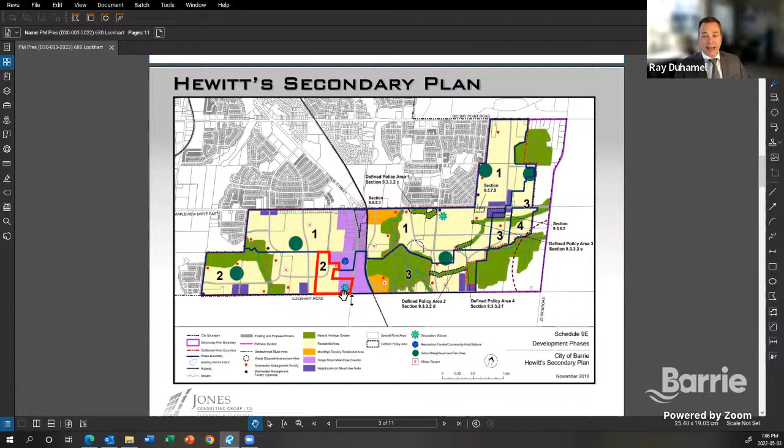This is the Hewitt secondary plan. As I noted, the lands are outlined in red, as you can see here, and they fall within a few land use designations. The first is the yellow area, known as neighborhood area, or residential area in the Hewitt secondary plan. Then this purple color represents the Yonge Street mixed use corridor. There's also this blue star shape, which represents a secondary school.

This is your new official plan, if you can see that okay. I know this is not yet in effect, but I thought I would share with committee and members of the public what the new official plan is sharing about these same lands. So the lands are outlined in red again.

They're adjacent to what is identified in the new OP as an intensification corridor. This stipple pattern throughout this area is known as the designated greenfield area. If you move to the right side of the screen, you can see the actual land use designations, now called neighborhood area rather than residential area, but effectively much the same thing.

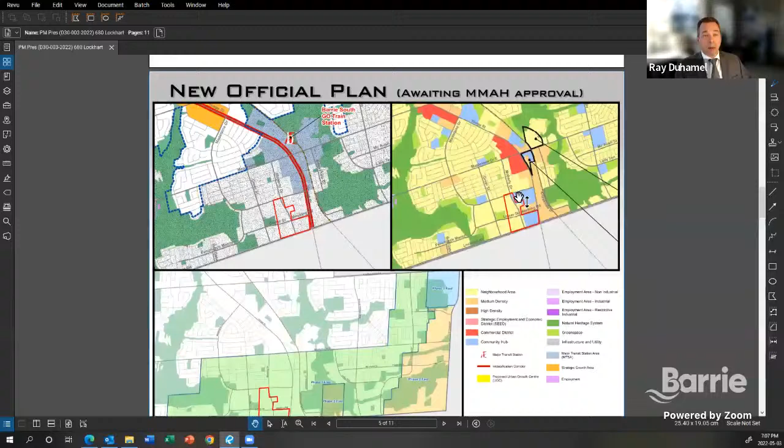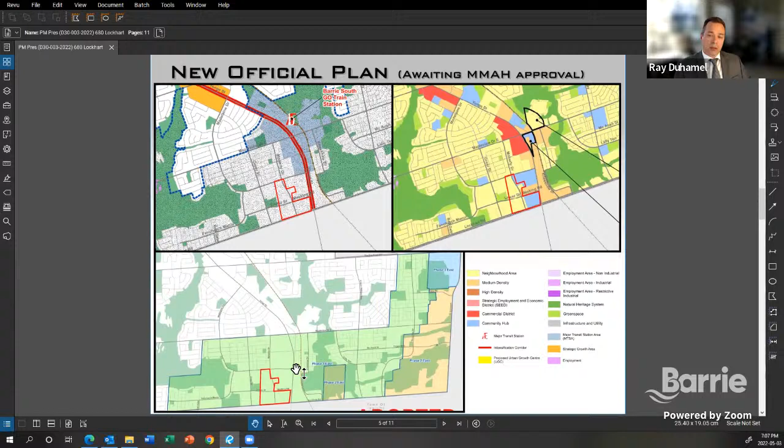Instead of mixed use in purple, like the Hewitt secondary plan, those are now shown as community hubs. Those lands will represent the Catholic high school, as well as a recreation center, library, and a public elementary school. In terms of phasing, you can see on this plan the lands fall within phase 2 of development, which is allowed to proceed immediately.

The process in proceeding with an application for a plan of subdivision and zoning bylaw amendment is to first submit a conformity plan to the City of Barrie so that technical staff can review the application to confirm whether or not the plan as proposed generally conforms to the Hewitt secondary plan.

In this case, at the bottom of the screen is Lockhart Road and to the right is Yonge Street. We provided for a mixture of housing types, including townhouses, detached, semi-detached, and some back-to-back townhouses proposed in this location, as well as the school block and a collector road northbound connecting Lockhart and Madelaine, and a collector road east-west connecting Amenity Homes and the park next door through the Crown development site out to Yonge Street.

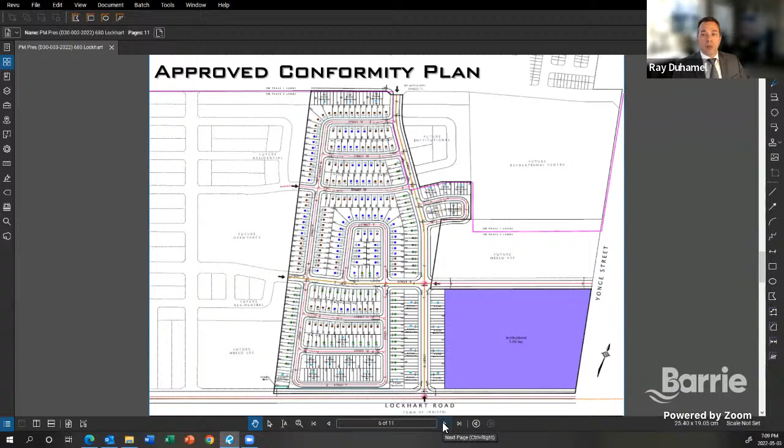Conformity approval was granted in May of 2020, and that allowed the applications to proceed for submission because city staff deemed that the application generally conformed to the Hewitt secondary plan. That opened up the requirement to start the technical work in support of the application.

As the committee is well aware, every application contains a wide variety of technical studies that have to be undertaken. For the benefit of the public watching at home, please be aware that these studies are all available to be reviewed on the City of Barrie website. If you have any comments, you could email me, or send those comments directly to the city's file manager, Andrew Gamario.

The school was identified on the phase 1 plan for our public elementary school. The school board reached out to Rainsong to discuss creating additional land that could be added to their school block as part of this phase 2 draft plan. So if you recall my point before, where we had some back-to-back townhouses in this location, that has now been converted to a block for use to add to the size of the public elementary school site that will be located here.

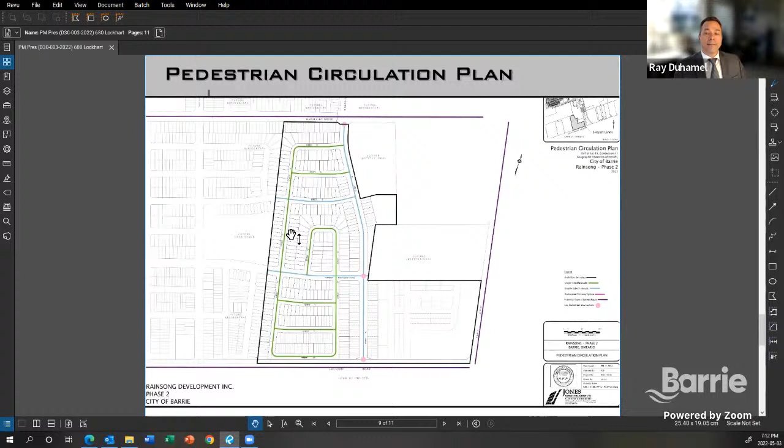This is the proposed zoning bylaw schedule. Fairly straightforward - the majority of the site would be zoned in the R5 category, which permits single detached, semi-detached, and townhouse units. The school block here would be developed in the same zoning category as the adjacent school block.

The special exception in that case would allow for residential uses in the event the school board determined that they did not want to acquire that school block. The same would apply for the Catholic high school site in the event they didn't want to acquire the lands - there would be provisions for residential uses beyond that.

And then a small triangular area here, as you can see, is proposed to be zoned neighborhood mixed use. That's basically being held with a special provision to allow for coordination with the adjacent Crown development site as they move forward through the process as well.

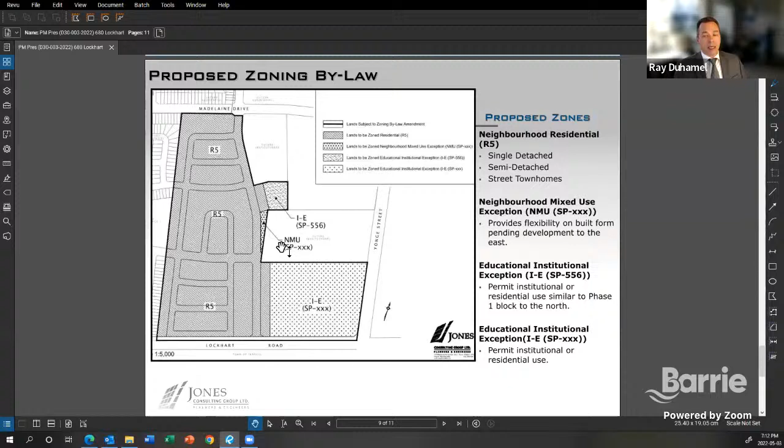This is my last slide, and it just provides an illustration of the type of built form that is contemplated - not exactly, but these are sample renderings that were prepared.

The top examples and this example on the left side are the semi-detached product, and this bottom right shows the townhouse product.

You'll notice some of the more obvious points built right into the policies of the Hewitt secondary plan and implementing zoning bylaw: not having protruding garages that stick out in front of the houses and block the view lines down the street, creating a more pedestrian oriented environment, variation in building materials and overhangs for pedestrian comfort, and different materials for architectural interest.

So, Your Worship, members of the committee, that concludes my presentation.

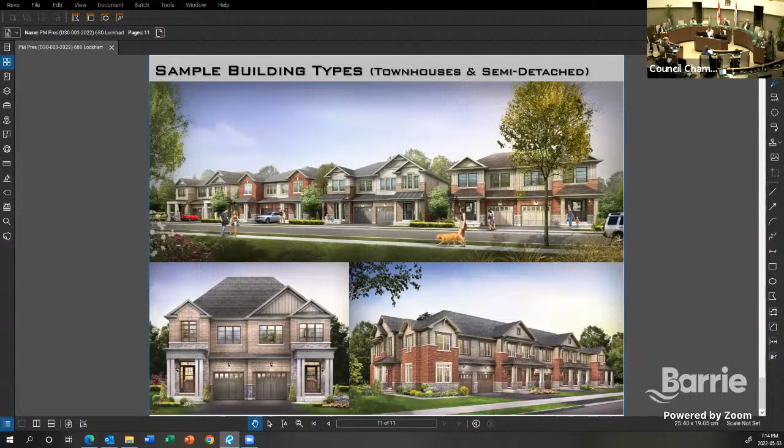Planning staff are currently completing the technical review process associated with this application. We didn't hold a neighborhood meeting for this project due to the limited number of properties within the circulation distance. This is not uncommon in the secondary plan areas, particularly when the majority of surrounding property owners are part of the landowners group, but members of the public still have the opportunity to ask questions and reach out to the applicant.

Or staff, and provide comments either this evening or at any time up until council makes a decision. The technical review is underway, not only with city staff, but also our external agencies and technical team across the city. An analysis of the application will come back in the staff report when it's brought back to Planning Committee.

So at the moment, the main planning and land use matters we're studying are conformity with the Hewitt secondary plan, including not only land use, but site servicing, grading, stormwater management, and anything that ties into the master studies prepared for the entire secondary plan.

Just ensuring that the built form, the site layout, and overall design contributes to an active streetscape and pedestrian realm, efficient use of land and resources, and optimizing existing land as well as planned and existing infrastructure.

Connectivity between this property and things that are planned and existing in the surrounding area, as always, preservation of private and shared boundary vegetation and any impacts on traffic operations in the area.

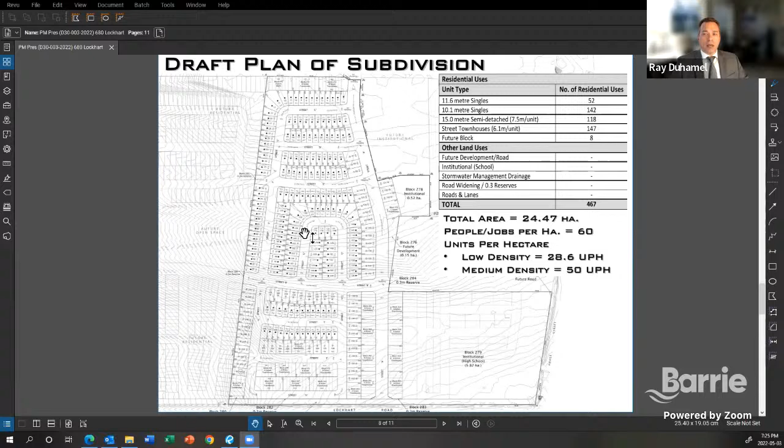Through your worship to Councillor Morales, while it's certainly possible to do a conceptual layout of a school and communicate with the school board about the size of school they intend to build - one story or two stories, what design parameters will follow - I think practically and functionally that would just be a concept plan. It wouldn't provide you any comfort because they wouldn't be bound by that conceptual plan. Just like if the owner of this land was looking to develop the site, there's a lot of work involved in the actual site plan design process, working with grades for stormwater management, location of parking facilities and so on. I think you need to undertake that technical work specific to the site plan block, which is what the site plan control process is really about.

So my thought as a response through your worship to Councillor Morales is that you provide very clear instructions to staff that you expect the alignment of the kiss and ride to be a fundamental component of the site plan review process, and make sure they're satisfied that the kiss and ride designed into the school site plan process is to staff's satisfaction - I suspect that is already a key consideration for staff. But I think you need to be aware in this particular instance...

These two blocks are located separate from each other. This is an elementary public site, and this is a Catholic secondary school site, so there are different boards and different categories of schools. This school will have an integrated relationship with the adjacent recreation center, park, and library facility, so it's vastly different. But I will say in both cases, both the rec center and the school board have the opportunity potentially for shared parking.

There's a lot of opportunities. I've worked on other examples, I can think of Wasaga Beach where there's significant parking for a park also used by the school, which contains some recreational community center facilities. These sites have ample frontage on two collector roads, so there's lots of opportunity to create a very workable and functional kiss and ride system. Same thing with the high school site here, with lots of frontage on Yonge Street and Lockhart, both arterial roads. So there should be plenty of opportunity for staff, particularly your traffic engineering staff, to review the efficiency of that kiss and ride.

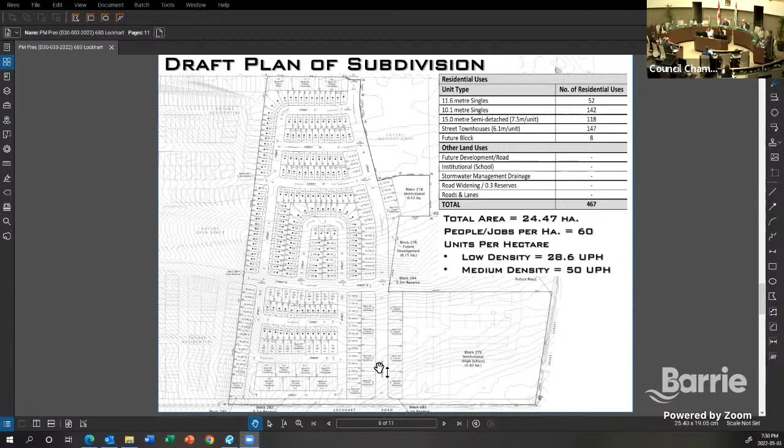Perfect. Quick question - where the proposed school sites are, I don't know if you're able to zoom in a bit. I see a couple of parcels, right? Future parcels. There we go. Yep. So the 129, 130, 131. Yeah, a little bit more north. Go a little bit more up. Sorry, go this way. Yep, so these units here. These ones here? Correct, but on the left side. Oh, over here? Yeah, yeah.

So because it's in proximity of future school sites, is there any intent to make those units not have driveways on a collector road? Again, I'm just picturing another Loon Avenue, another Livingston East, where you have a school and driveways, and people are, maybe not parking, but standing - a no standing zone where they'll be in their cars hovering. People will need to get out of their driveways because they live there, and it just becomes another situation.

Whereas if this was designed in a way where there were no driveways facing the main road—because there's access through a laneway in the back, or another type of design perspective—you see a lot of this on major roads in the GTA, and I say that in a supportive way, because it's smart design. So I was wondering if maybe the units at least fronting the school site could have similar consideration.

Through you, Worship, to Councillor Morales, there are obviously examples of design scenarios with dual frontage lots. I think driveways on collector roads are one of the last opportunities to slow down traffic, especially since the geometry is quite straight per the transportation manual. One key difference now is that we're universally removing parking from collector roads, which has never been the case in Barrie before. If you also remove driveways, I don't believe the result would be a safer street—I think you'd get more traffic and higher speed potential. That said, it could certainly be looked at. But many school sites within Hewitt have been designed with similar configurations, and I don't think a few driveways for these semi-detached units opposite the school will result in a Loon Avenue situation.

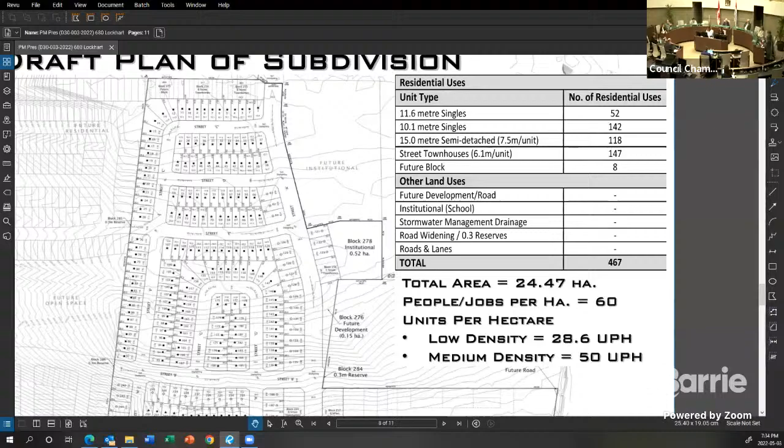I will now call upon a representative of MHBC Planning to provide the presentation concerning an application for an official plan amendment and zoning bylaw amendment submitted by MHBC Planning on behalf of Loon Avenue Lands OP for 338 Mapleview Drive East in Ward 9.

Assuming we have somebody online. Okay, we can see you now. We actually have Eldon Theodore, who's going to be doing the presentation today. I'm not sure why it invited me as the panelist, but Eldon Theodore should be on, he's going to be doing the presentation. Okay, just give us a minute. Yes, okay, we can see you. Yeah, that was a bit of a mix-up—I was wondering why I didn't have control. Thank you very much.

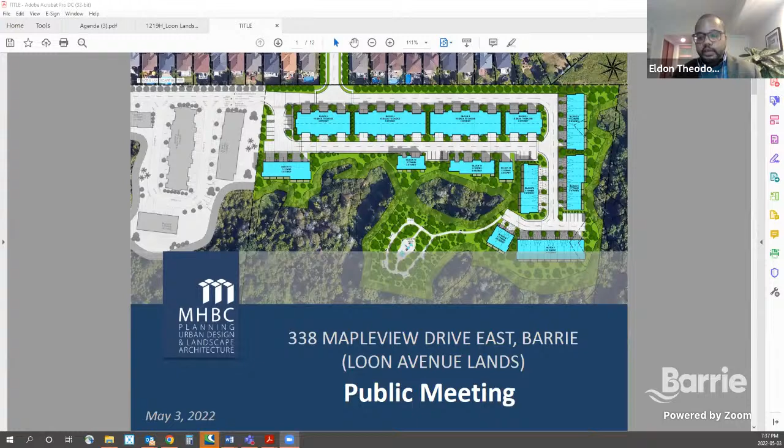Just to provide a bit of quick background, the subject lands are currently vacant. They have a total land area of 29.43 acres, but the actual buildable area or development limit, shown here in green, is 6.33 acres. The intention is only to develop that component to protect the balance, dedicating the balance of the property to the city for environmental protection. As a result, this proposal will actually be increasing the amount of environmental protection designated lands on the overall property.

The property has frontage on Mapleview Drive East, but the development limit and buildable area we show here is separated from that frontage due to wetlands and environmental areas central to the property.

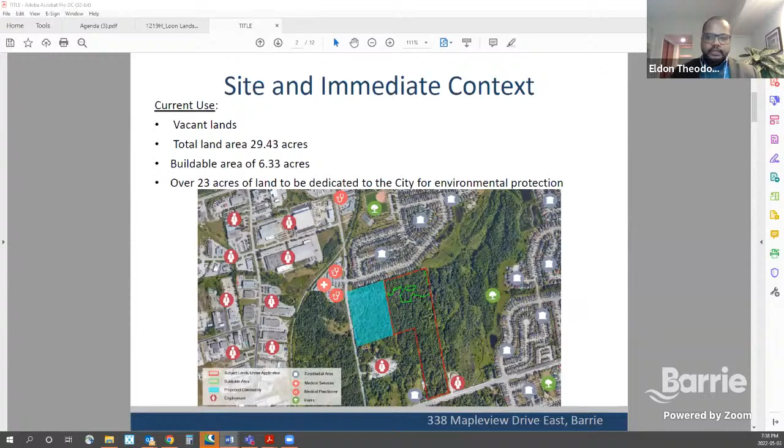The property also abuts the owner's active application to the west at 521 Huronia, shown in blue here. The buildable area and development limit we show represents a logical extension of those lands to the east. A plan has been provided to the city that illustrates the seamless integration of both plans in terms of shared movement between those properties.

From an official plan level, in terms of planning areas, the property is split, located within a residential area and an industrial planning area. As you can see from the blue outline, the development will only be located within the residential planning area of the site. More specifically, looking at land uses in the current official plan, the subject lands are designated general industrial and environmental protection area. The industrial designation permits a range of industrial employment uses.

However, in March of 2020, the city recommended the conversion of the industrial designation to residential on this property. It's important to note that the city's new official plan contemplates residential for the portions that are currently designated industrial, and I'll note that later in the presentation.

But as I noted earlier, and as shown on the balance of the property, there is no intention to develop environmental protection lands. The intention for this application will be to increase the amount of environmental protection lands on this property.

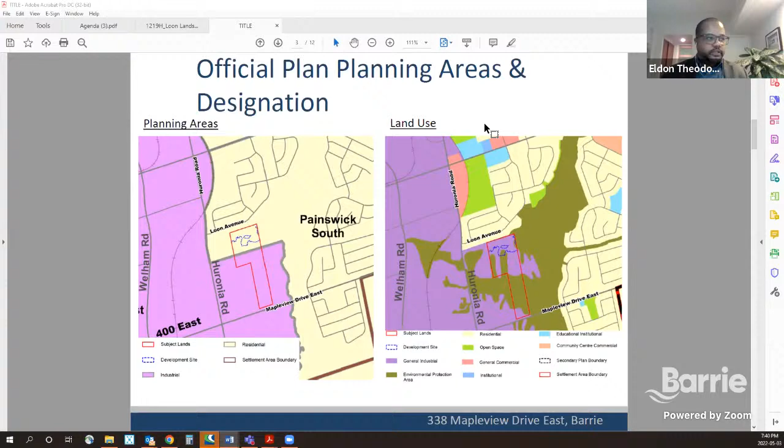In terms of the Lake Simcoe Region Conservation Authority, the subject lands are within a defined policy area, and as a result they will require permits from the LSRCA. Through this process, we have pre-consulted with the Conservation Authority on this site, and that consultation will continue as part of the development approval process, anticipating that the form of development that comes back to this committee and council will be one to the satisfaction of the LSRCA.

From a natural heritage perspective, the development limit is identified within what is defined as level 1 with existing development designation, as well as having a small portion within level 3. These defined policy areas require it to be demonstrated that development impacts can be mitigated by way of an environmental impact study to the satisfaction of both the city and the Conservation Authority. Through our submission, an environmental impact study has been prepared to confirm the appropriate development boundaries and ensure environmental protection is achieved as part of this application process.

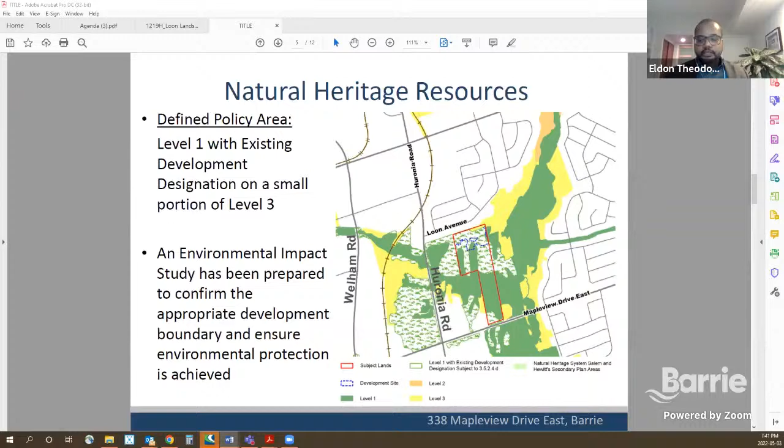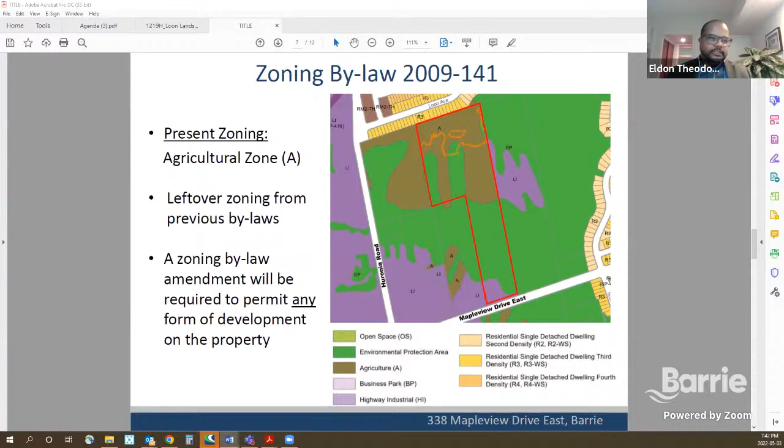From a zoning perspective, subject lands are primarily agricultural, with a small component being environmental protection. The proposal for this application intends to rezone the lands similar to the approach being taken for 521 Huronia, to implement provisions that allow for a built form consistent with the concept.

The proposal itself is for 53 traditional townhomes and 52 back-to-back townhomes, for a total of 105 townhome units. This development plan is intended to respect the limits of the adjacent wetlands, working meticulously to both avoid as well as recognize it as an asset to the overall development. That's why you see unique features in the plan, such as pockets of wetland, tree protection and management areas, and restoration areas, all part of an environmental and landscape strategy to both protect and recognize the features of the site.

We learned a lot from the application at 521 Huronia. The overall plan was designed to take into consideration a lot of the concerns we heard through that process. This plan started from defining what we believe are the environmental features, which will be reviewed and considered through the process, recognizing an appropriate separation distance from existing homes, integrating elements such as landscape buffers, and then identifying where it's appropriate to put in building footprints and where it's appropriate to define road patterns.

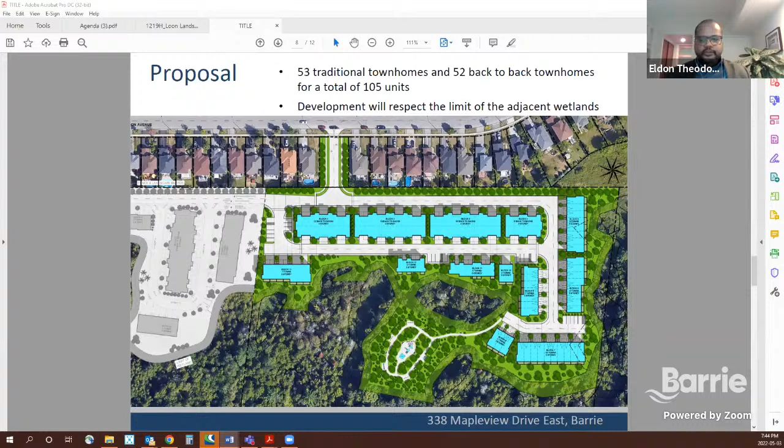Parking and loading are all internal to the site, with all turnaround and movements controlled internally. 228 parking spaces are proposed, resulting in a total of 2.17 spaces per unit, which exceeds the bylaw requirement of 1.5 spaces per unit. There will be 105 garage spaces, 102 driveway spaces, and 21 surface vehicular parking spaces.

We understand through our community meeting in December of 2021 that there were concerns raised about traffic calming on Loon Avenue. As part of this process, we intend to work with the city to assist in controlling the speed of traffic along Loon, recognizing this development has an opportunity to contribute to an off-site solution that currently exists within the community, while ensuring this development doesn't contribute negatively to that environment.

The proposal also provides an enhanced pedestrian experience through sidewalks located within the plan, providing pedestrian connections to Loon Avenue as well as the development to the west.

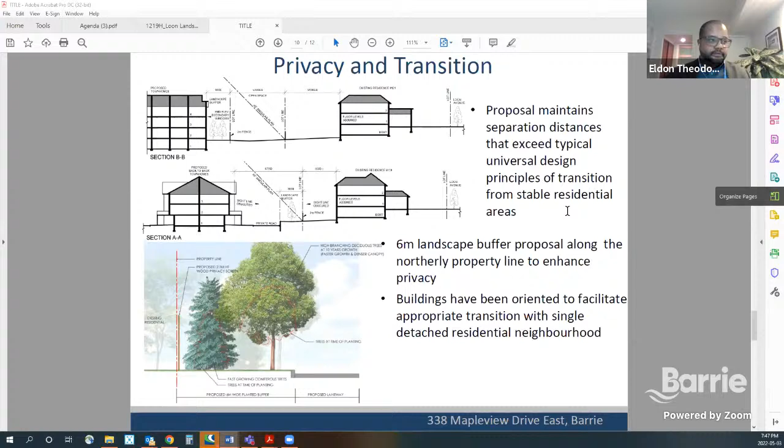As mentioned earlier, this application will increase overall environmental protection. Our environmental impact study will help confirm the appropriate buffers as they relate to building footprints, validating their location on the site. Measures have been recommended and taken to ensure protection of wildlife habitat as well as wetland features, which will be protected and enhanced through the management of this site.

Should this application be approved, approximately 80% of the overall lands would be protected through redesignation as part of this application. It really is the owner's objective to prioritize the natural environment as a feature and an enhancement on this site.

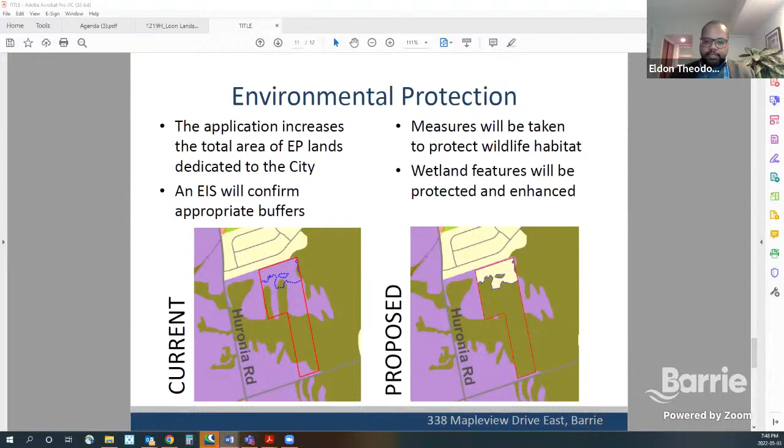My last slide is about the architectural typology contemplated, consistent with what has been shown and contemplated at 521 Huronia. Having a contemporary architectural style and maintaining that consistency is important for community cohesiveness and creating a local identity within the site itself.

That's my last slide. I want to thank you for the opportunity to present, and I'm happy to answer any questions from the committee.

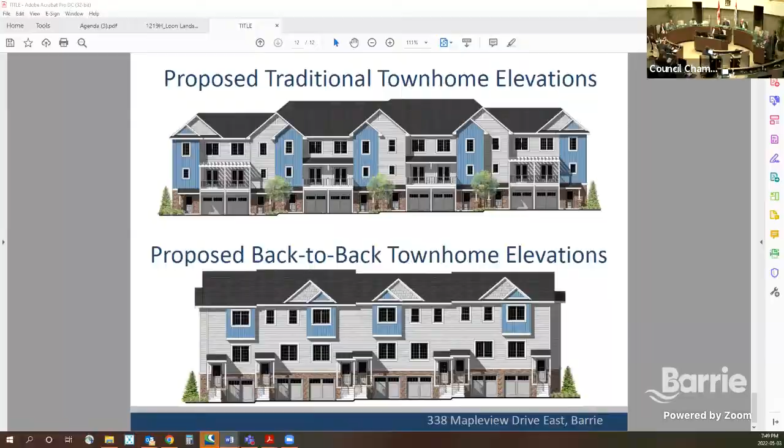Planning staff are currently reviewing the technical review of this application. The neighborhood meeting was held at the beginning of December 2021 with approximately 40 attendees, including the Ward 9 councillor, planning staff, the owner, the applicant, and members of the consulting team. Resident feedback at that time covered topics such as privacy protection, buffering from the new development, stormwater management concerns, increased traffic and potential overflow parking on local streets, and preservation of existing tree cover and environmental protection lands.

The technical review underway includes not only development services staff but also other city departments, as well as our technical agencies. In this case, a particular commenting body that's important is the Lake Simcoe Region Conservation Authority. Analysis of the application will take place when a staff report is brought back to Planning Committee.

The primary planning and land use matters being considered by staff at this time include establishing the acceptable development limit, which includes the buffer from Lovers Creek and the wetland feature, justification of the change in land use from general industrial to residential, traffic circulation and integration with the neighboring property, which as Mr. Theodore said was 521, that was actually just approved last evening by council. As always, we take a look at municipal servicing connections and transitioning from the existing built form in the neighborhood with this new proposal.

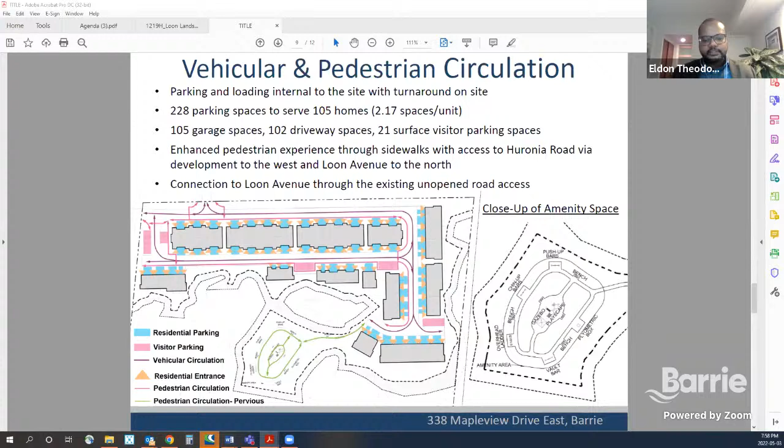Again, the thrust on this application has been through the process and working with my client on this before going to the public and before making an application. There was a more robust concept, and through discussions and recognition of environmental features, the plan was pulled back to recognize and work with the environment. So the outcome of 42 units per hectare is the product of that portion that you, as members of the committee, don't have the opportunity to see.

Okay, perfect. Quick question for staff. They're at 42 units per hectare. Maybe they look at some of their corner units and design them in a way where they're duplexes or in-law suites, because obviously we're becoming more of a generational living society. Does that count? Does that increase UPH, or if it's a duplex unit, does it just count as one? I guess that's more of a staff question.

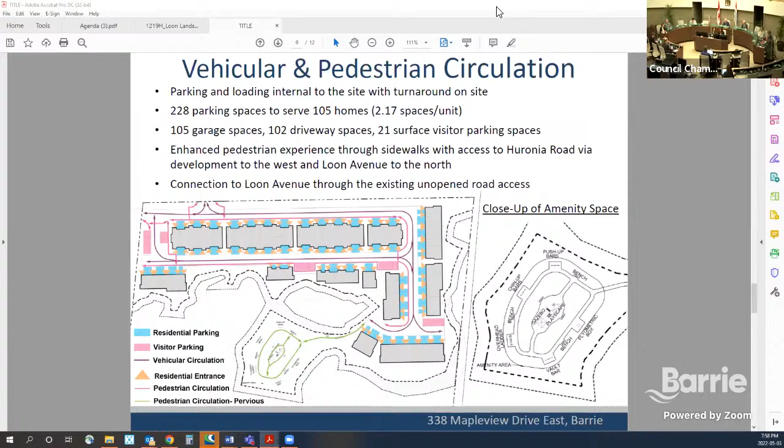Through you, Deputy Mayor Ward, to Councillor Morales: we basically, to get the calculations, do a blended people and jobs per hectare calculation, and it is based on the single unit, the first unit count. So I think some of this density looks probably a little bit less as it relates because of some of the environmental protection, but staff are going to look at all of this. The density is obviously going to be important as part of integration to not only the existing subdivision in the area, but also what we just approved. So we'll look at all of that through the technical review of the application.

Perfect, and the environmental piece definitely should be a core component, that shouldn't be on the table. That said, just to clarify, the first unit counts towards UPH, but if a unit is a registered legal duplex from the original build, it doesn't count as an added number to the UPH. It does or it does not? I just want to clarify. Through you, Deputy Mayor Ward, to Councillor Morales, it does not. It does not. Okay, perfect. Those are all my questions. Thank you for the presentation.